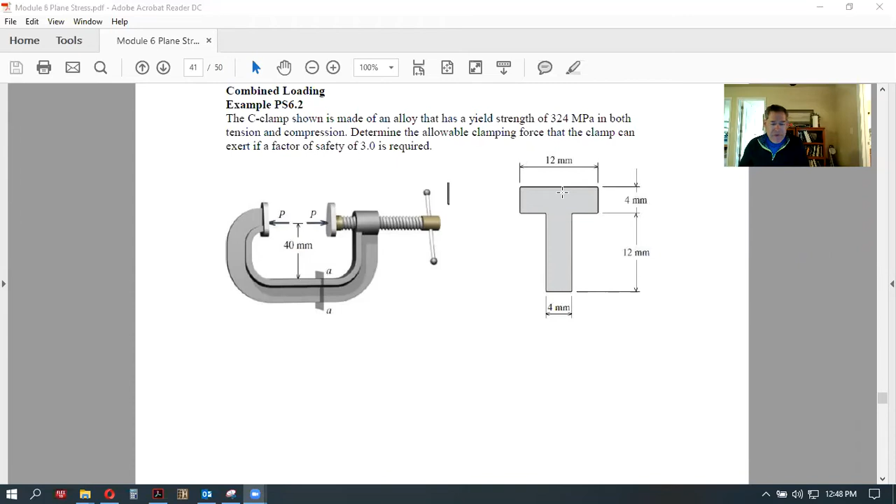So we've got some basics of the problem restated here. Here's our clamping force, there's the C part of the clamp. A critical distance here is the 40 millimeters from the centroidal axis of the clamping force down to the top of this cross section, the top of this T. The T is 16 millimeters high, the stem is 4 millimeters wide, whereas this flange is 12 millimeters wide. Again, here's our yield strength and our desired factor of safety, and we're going to go find out what that allowable force is.

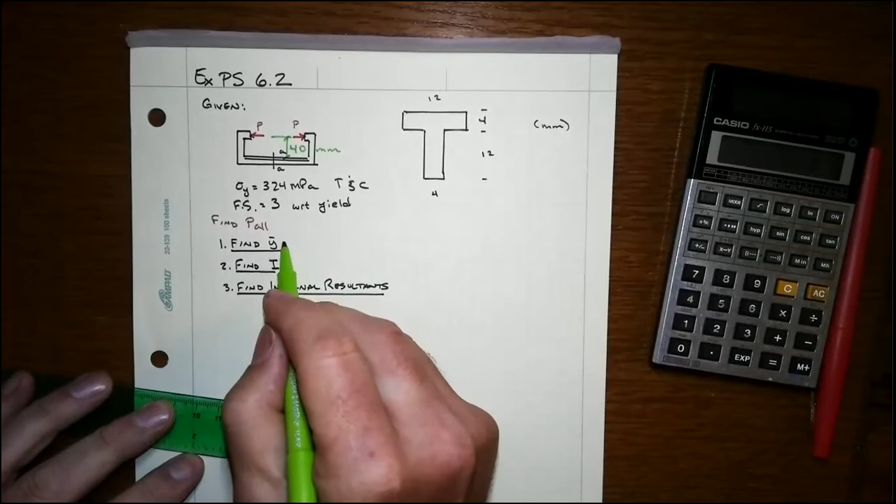So we're going to just report what some of the preliminary work is, so you can have a review opportunity to go back and confirm how it all works out. We need to find the centroid of this cross section, and we'll find that the area is 96 square millimeters along the way. That's an easy one: 4 times 12 for that rectangle plus 4 times 12 for that rectangle, that's 48 each, so that's where our 96 comes from.

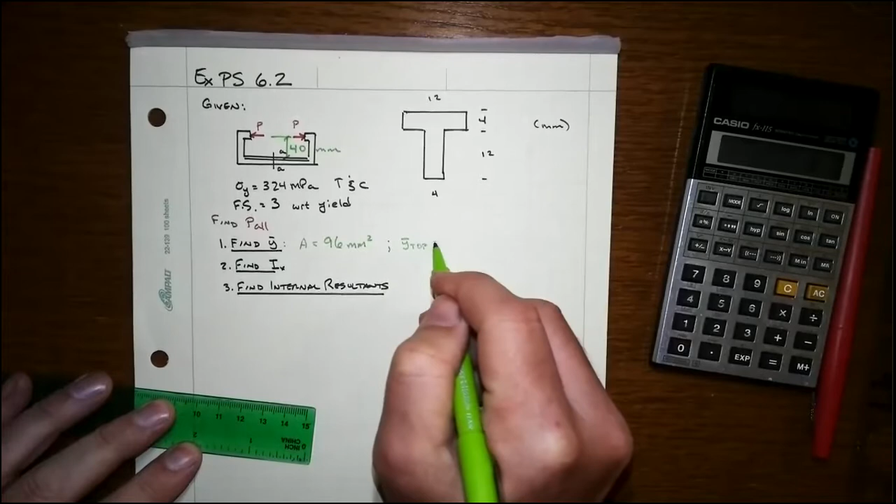But when you go find the y-bar, what you'll find is that from the top it is 6 millimeters. So the geometric centroid of this cross section is located here at 6 from the top, and then 10 millimeters from the bottom.

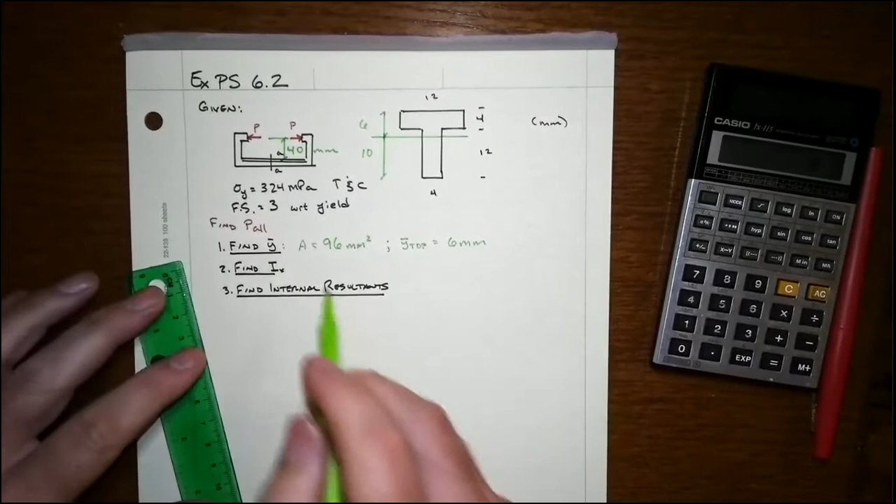Then we're going to apply the parallel axis theorem and find our second moment of area with respect to our bending axis, and that is 2,176 millimeters to the 4th. There's nothing obvious about that answer; you have to go perform the appropriate calculation to get there.

Now let's look at the statics of the situation. When we go look at this cross section, there's the top of it, there's the bottom of this portion, and there's that part. When we go do the free body diagram, let's do that quickly up here.

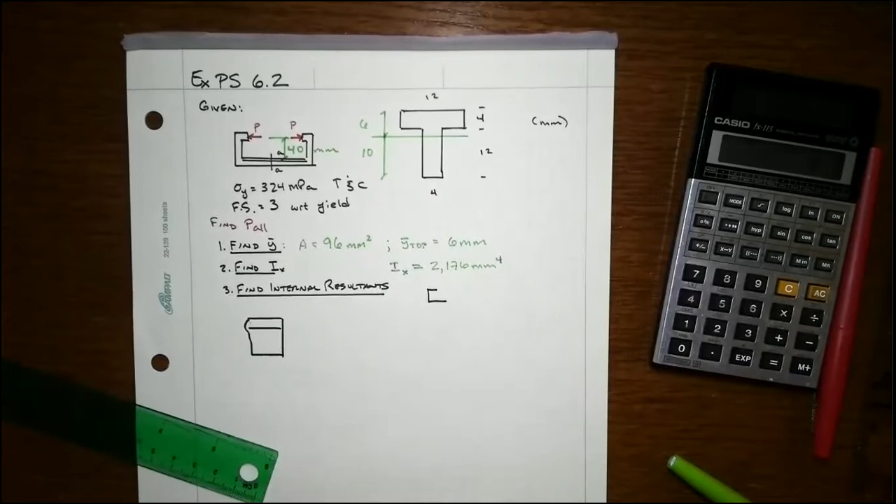There's your compressive force at the top from the clamping. That means for equilibrium down here at this location, right through the centroid, we're going to have the same force P. And then we'll have a force couple, tending to spin this in a counterclockwise fashion, so we'll have to have a restoring moment M that is opposite of that, equal to P times the eccentricity.

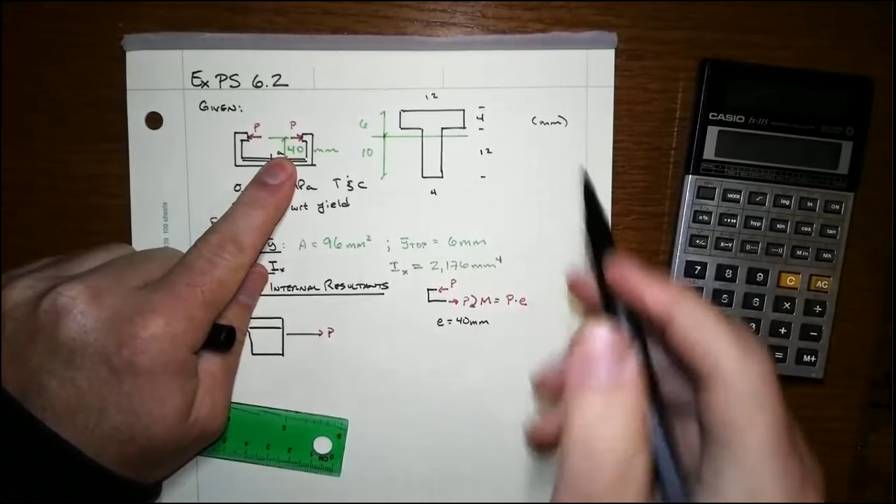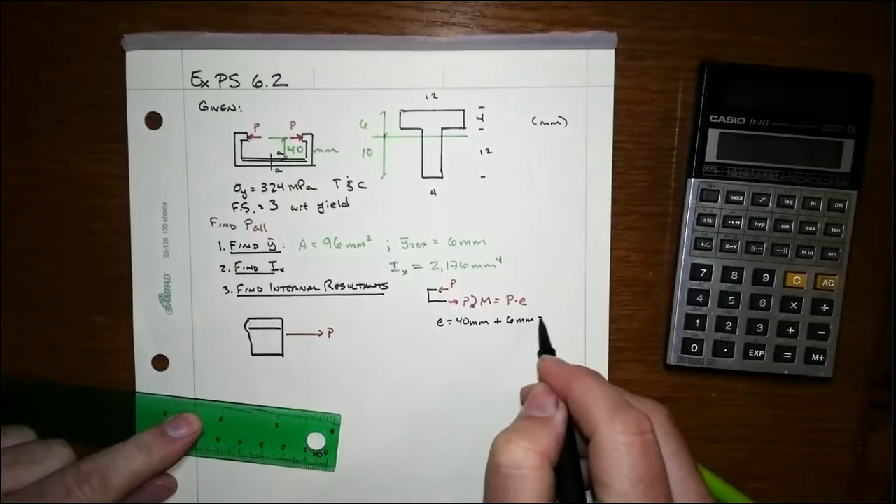Now the eccentricity here has a little wrinkle in it, and that is because it's not the 40 millimeters — the 40 millimeters only takes us to the top of the section. We have to go down to the centroid, and that's another 6, so the eccentricity is 46 millimeters.

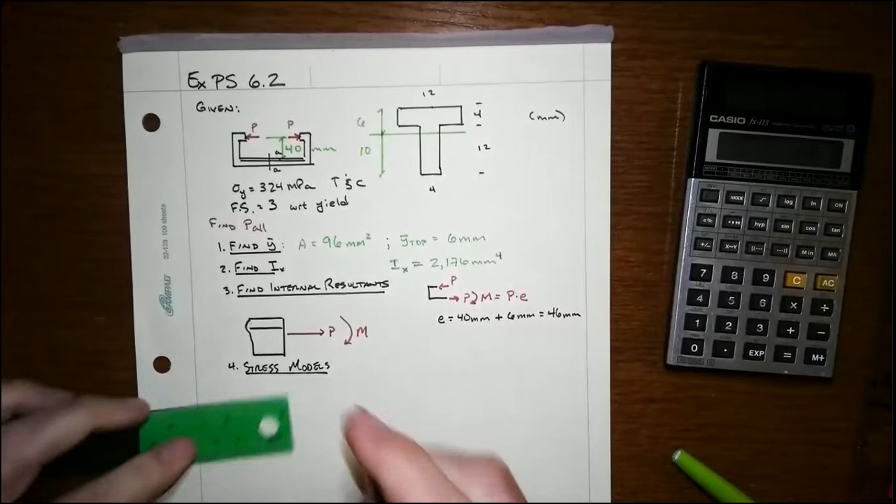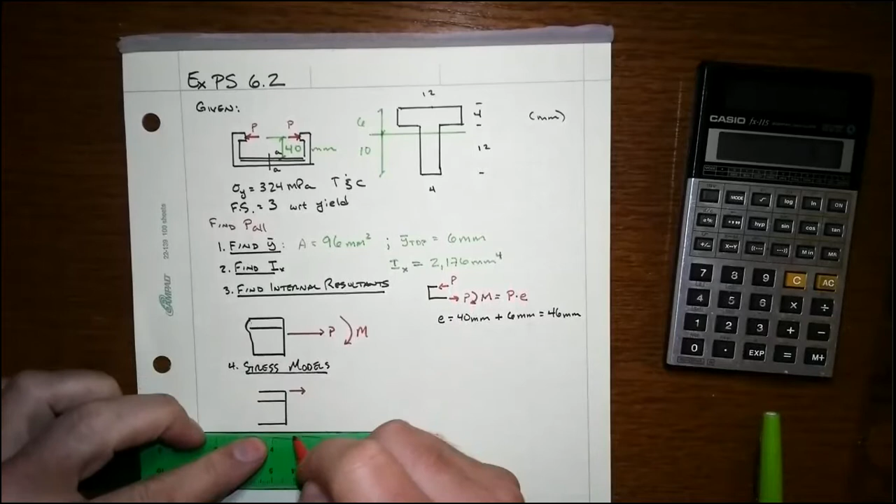So there's your two sets of internal unknowns, and from those we have our stress model, one for each of these. Although we could just write out the formula, what I want to do instead is show the stress diagram that goes with each of these, to emphasize what's happening here.

So there's our axial stress, which would be equal to P over A, in this case P over our 96 square millimeters. Now the stress distribution that comes from the bending moment is going to be sigma equals M y over I. With the way the moment is set up here, we're going to have tension on the top and compression on the bottom. The neutral axis is closer to the top, so the top stress is actually smaller.

Let's get that model in first. Sigma bending would equal M y over I. Now we have to decide which of these two is going to be the worst.

You have to decide, is the combination here at the top going to be a lot worse than at the bottom? I'd tend to think it's going to be dominated here at the top, tension and tension, but it's all about the two magnitudes, which is going to be the total worst effect. So I'm going to go look at the top.

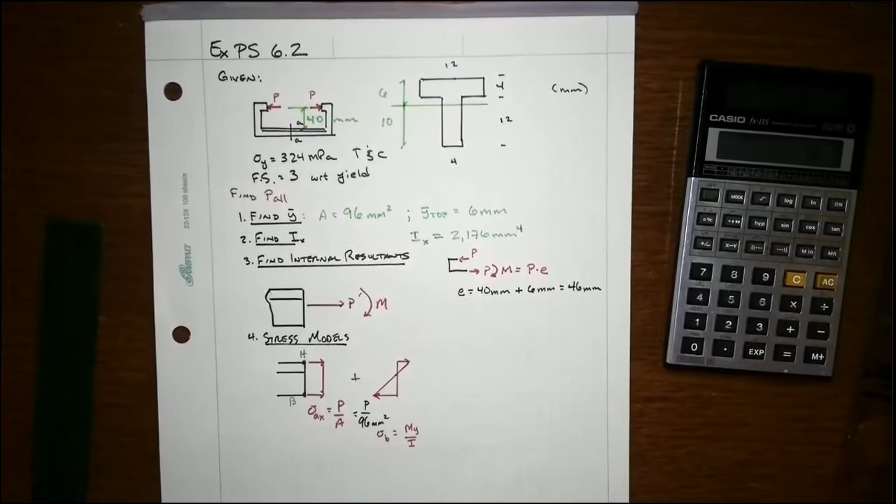And for that, what we might do is call that H for the top and capital B for the bottom. We might have to do both, to be honest. We'll have to see here.

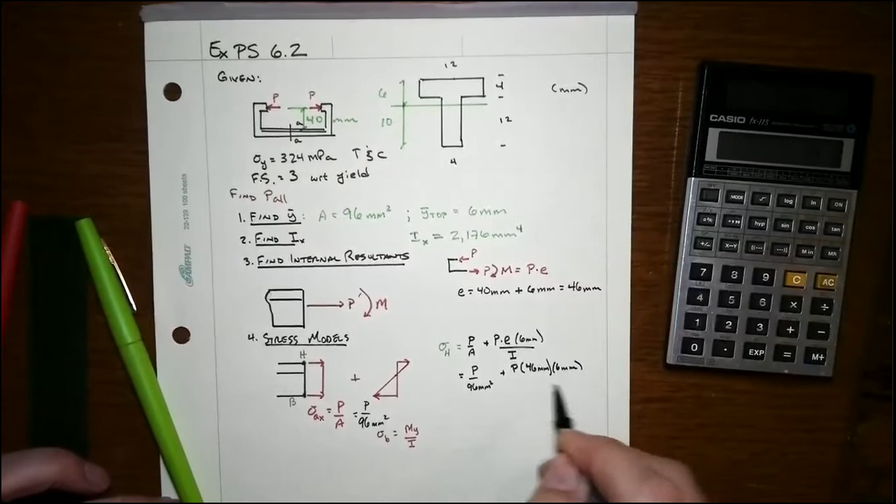So let's look at sigma H. That's going to be P over A plus M, which is P times E times that distance to the top, 6 millimeters, over our I value. Numerically, that's P over 96 square millimeters plus P times our 46 millimeters times our 6 millimeters divided by our 2176 millimeters to the fourth.

Now our sigma at the bottom is going to be compressive, P over 96 square millimeters plus P times our eccentricity of 46 millimeters, and then it's no longer 6 to the bottom from the neutral axis down, it's now 10 millimeters, over the I.

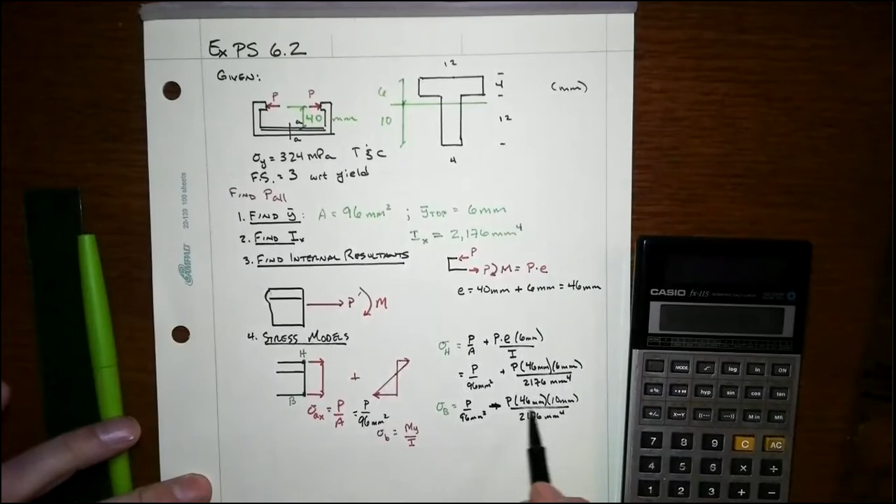And I hope you're seeing that I made a potential mistake here. This is a compression, so we need that to be negative. What are we going to have here? 2176 divided by 460 is 4.73. That's a smaller number here in the numerator, the effective numerator, which means the compression is going to overwhelm this value.

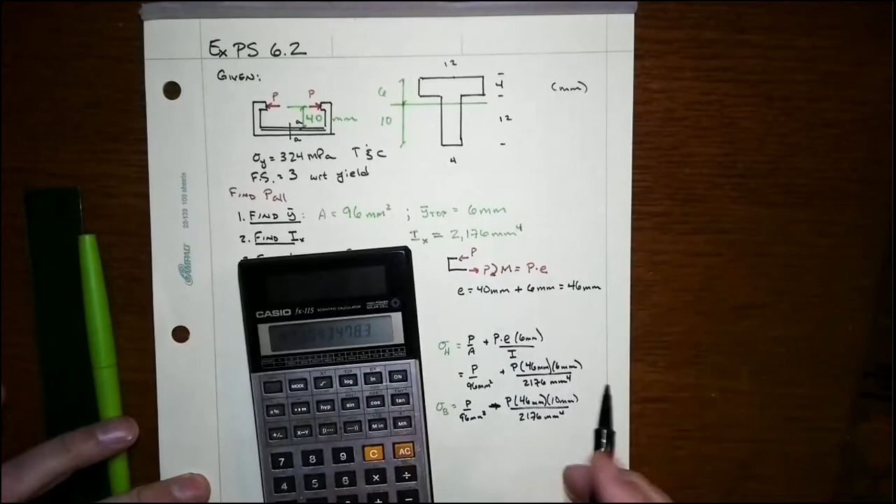Let's see, that's the same. Well, it's not the same at all. Still hard to see what's going to happen here. So let's work it out just one more step further.

Sigma H, let's make a common denominator kind of thing going on here. So we've got 2176 divided by 46 divided by 6 is 7.88. Yep, 7.88. And so that would be P over 96 plus P over 7.884.

What we'll do is find out what that equals, plus then take the reciprocal of that. I'm just casting this in terms of this denominator, so I have a feeling for how big this number is going to be, 7.286-ish. Do the same thing with sigma B.

And just draw a line between those to help keep them separated. We've got P over 96, and then this 2176 divided by 460 is 4.73. And we get a negative.

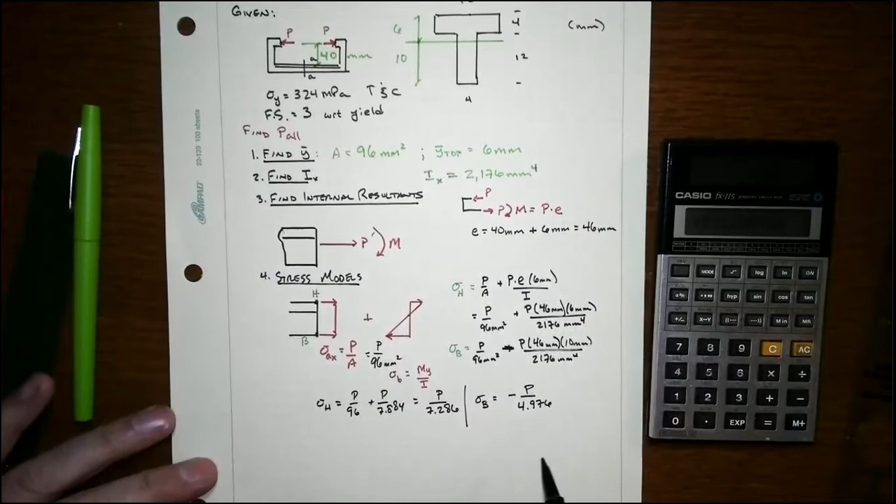We're controlled by compression. And so now our allowable stress is pretty easy to find. Sigma allowable has to be smaller than the yield, so that's our 324 megapascals divided by our factor of safety of 3. That's going to be 108 megapascals. Now we can find our allowable load.

We just have to solve these two. So down here at B, what we do is set our sigma B equal to sigma allowable and solve for P. That would be P equal to 108 megapascals times our 4.976 square millimeters. Where do the square millimeters come from?

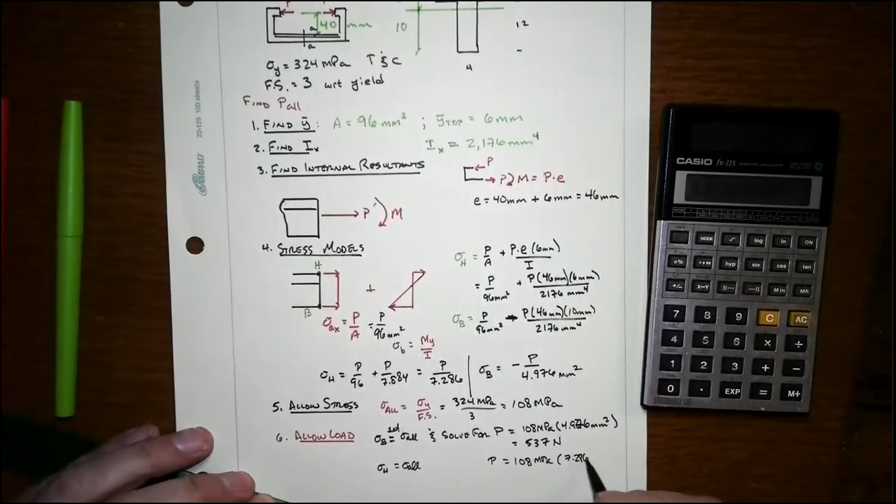newtons for that one. Now, if you want to check the other one for fun, we'll find that P equals 108 megapascals times 7.286, and of course 7.286 times 108 is the bigger number, and we need the smaller number.

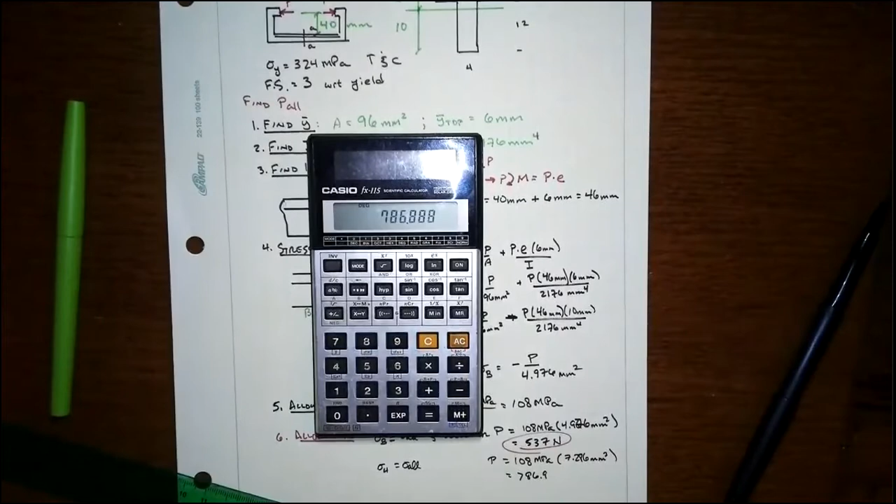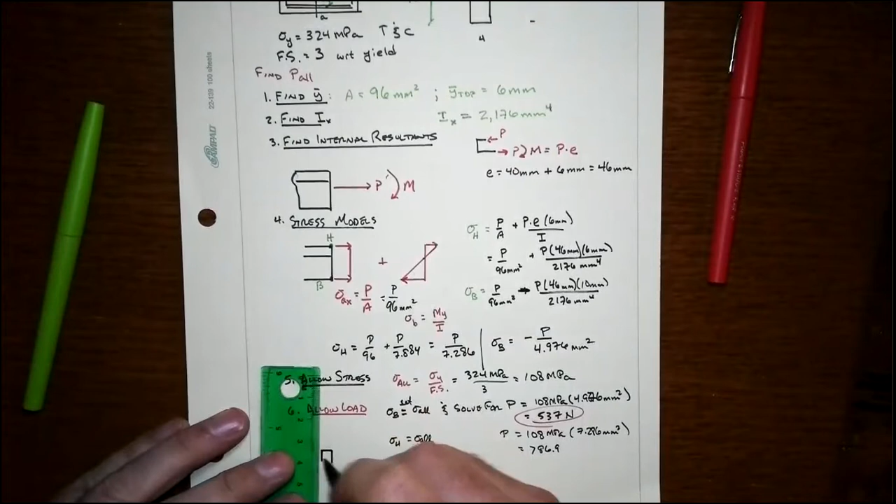So that's our answer. Now you might be thinking ahead, but wait a minute, what about Mohr's circle? Right, so the little stress block that we have down there at the bottom has got then a net stress at B of... I don't know what the net stress is.

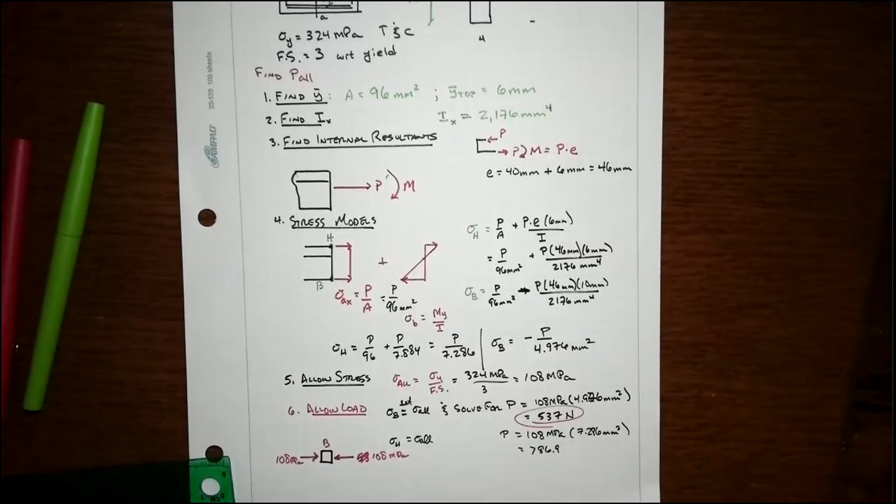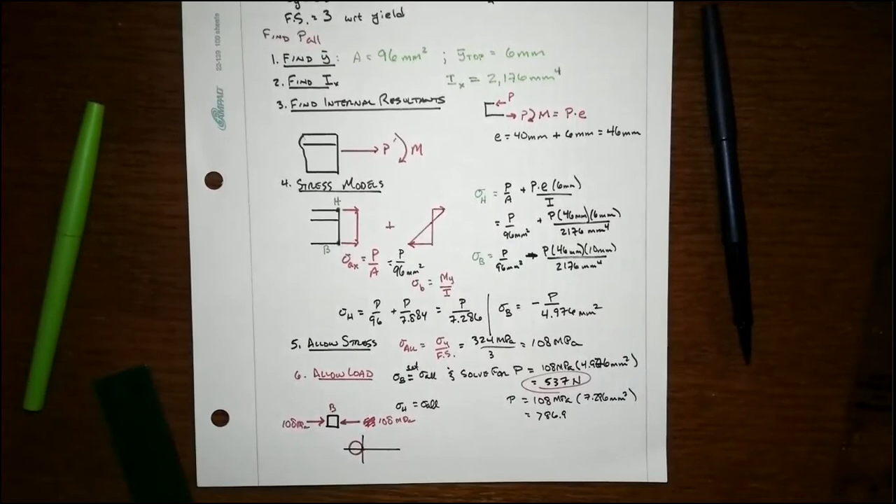What is it? Well, we set it equal to 108 megapascals. It's a uniaxial condition, so the max normal stress really is that value right there. Our Mohr's circle that would go with that would be, quite simply, one that looked like that. Might be tangent to the curve, and there's your 108 right there.

Whew, it's a lot of work, isn't it? Not too bad, but there's a lot going on there.